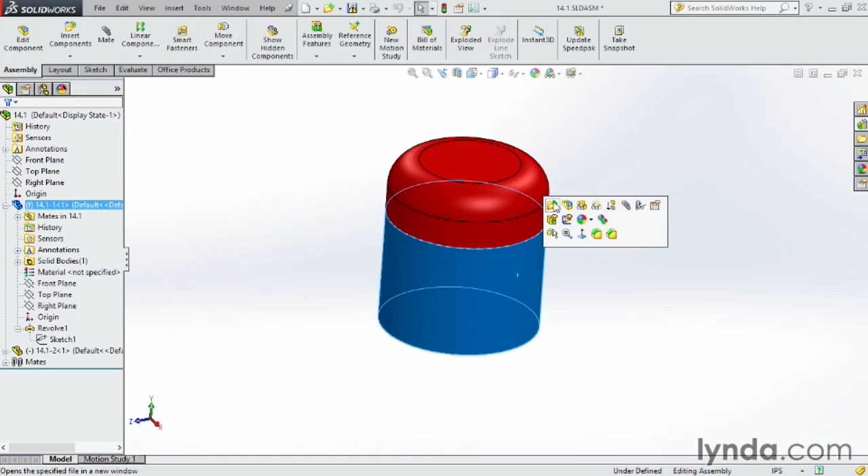To get started, let's take a look at this sketch here. So I'm going to go ahead and open that up, and I'm going to say open part. And you can see it's a basic revolve. I'm going to click on the plus and take a look at the sketch. So pretty straightforward sketch here. Just basically lines, and you can see we have a 3-inch dimension. So that's the dimension we're going to want to change. And then we want the lid to automatically adjust.

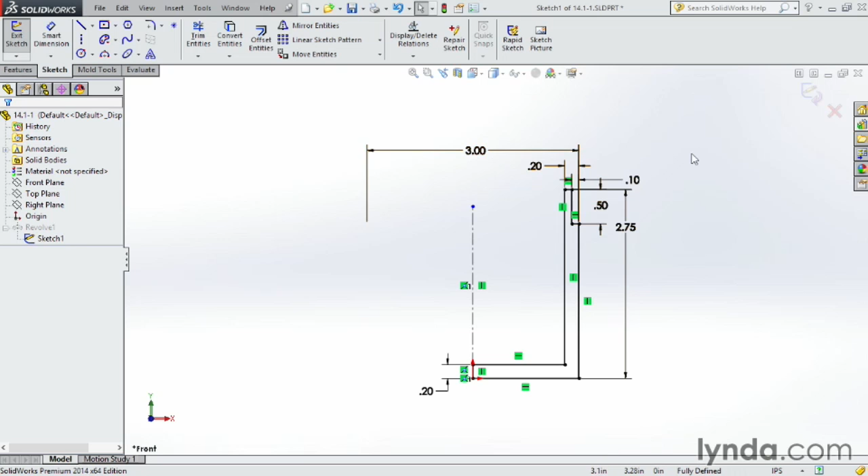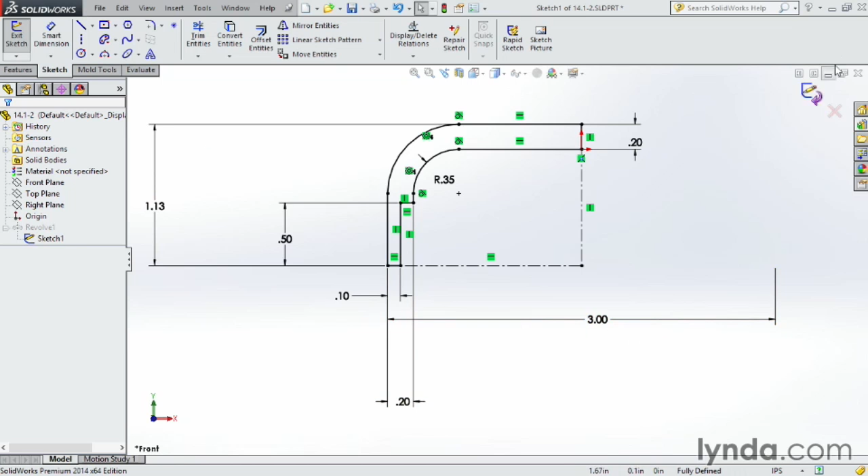So in this case here, we're not going to actually touch this part. I just want to show you what's in the sketch. I'm going to close that down, come back to the assembly, say yes to the changes, and then open up the lid. I can open the part again, and inside of that sketch, you can see, again, I've got that 3-inch dimension here, defining the outside of the part, and everything else looks pretty standard.

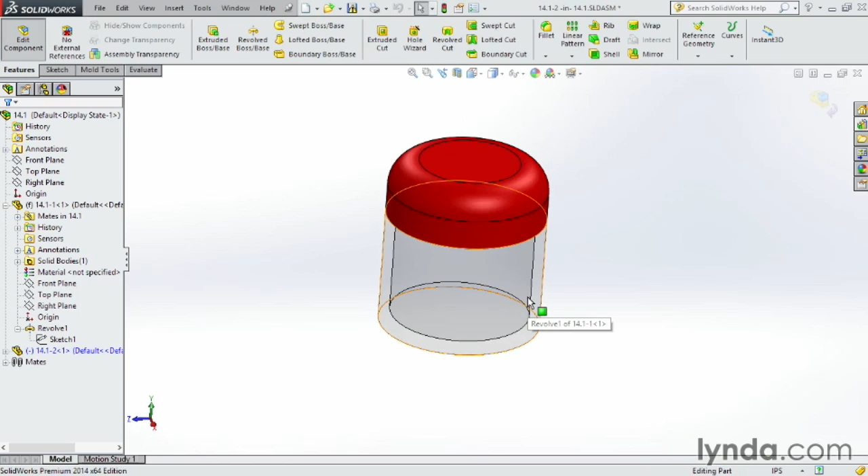Okay, now is the tricky part. Instead of opening these parts individually, let's open them in context to the assembly. In this case here, I want to change this part based upon this part. So right next to where I normally choose open, I can also say edit part. As soon as I do that in the assembly, the original part, the jar, turns clear or transparent, and it shows me that I'm editing only the lid.

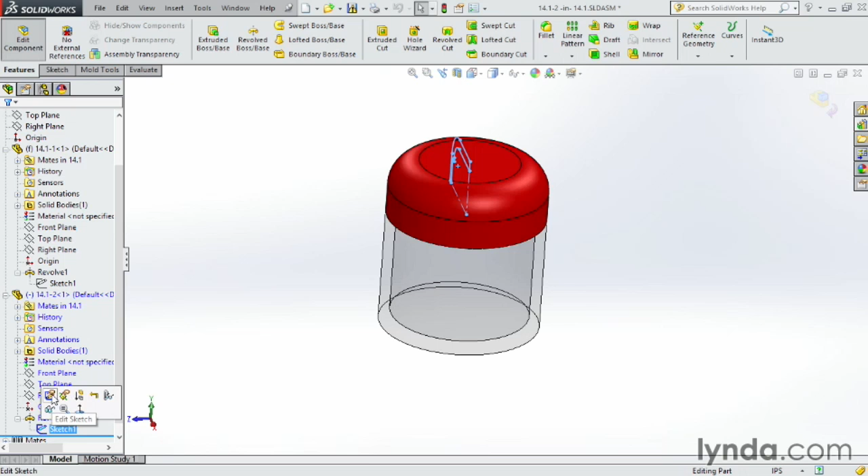Then I can come down here to where the lid is, and notice the entire tree for that lid opens up just like we were looking at individually in the part. I can click on the revolve, and I can open the sketch. First things first, you need to determine where is the dimension that we want to drive from the other part. In this case it's pretty simple because there's only one revolve in each part. Let's choose Sketch 1 and click on Edit Sketch. I'm going to click on the space bar to look normal to the part.

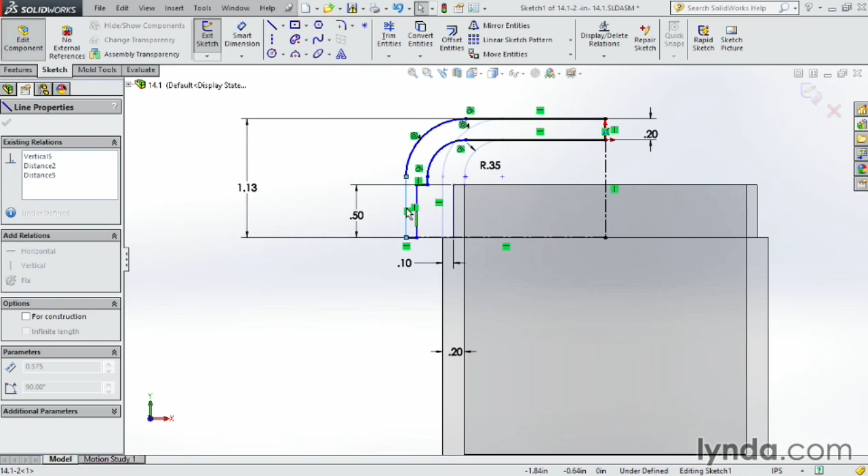And now, we've got this hard dimension here of 3 inches. What I need to do is get rid of that dimension right away. Click on that, hit delete, and now I can grab one of these lines and drag that out and double check that that's going to give you the right type of motion. As the jar gets bigger, I want this to track and do the exact same thing. Then, instead of adding a hard dimension, let's put a dimension in relationship to the base jar. Or instead of a dimension, we can add a relationship as well.

In this case here, I could take this point or this line and make it coincident to this line here. Let's try it out. Click on this line here, hold down Control, choose this line here, and I'll say Make Collinear. Now those two lines are going to be in line all the time, and there's no hard dimension defining it as 3. So if this jar gets bigger, theoretically, this lid should get bigger as well.

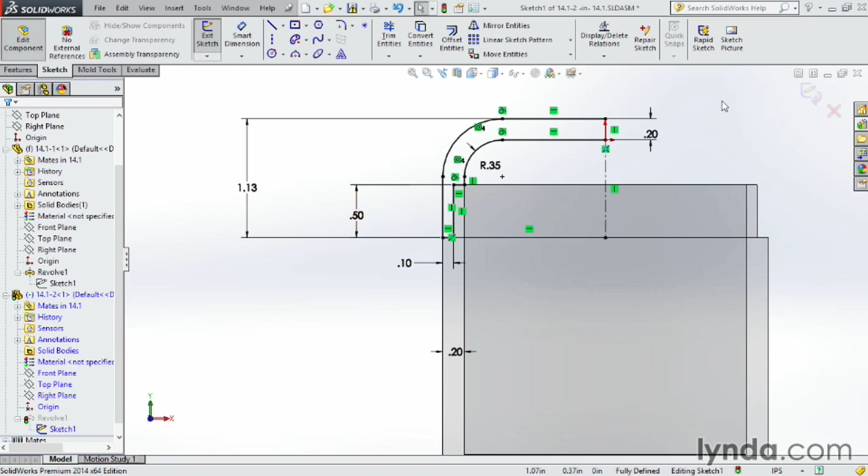When you're happy with your changes, click on Exit Sketch, and you're noticing the assembly didn't change at all. What's going on here? Nothing changed. Well, here's the power. Let's open this part now, edit that part, go down to that sketch. Instead of the 3 inches, let's change it to 6 inches. 6.0, exit sketch, and then go back to the assembly. And notice right away, the lid automatically changed size to fit the exact same proportions. They auto-update based upon that relationship between the two parts.

Now this is only the beginning. You can make this extremely complicated, and you can have many different parts changing based upon one driving part, and you can have parts defined off of other parts, and so on. It can get pretty complicated, but it really starts using the power of SolidWorks. External references can generate highly automated assemblies. Best practice is to have one main driving part and have the others reference it. It is possible to create a circular reference, so make sure you think through what's driving what.